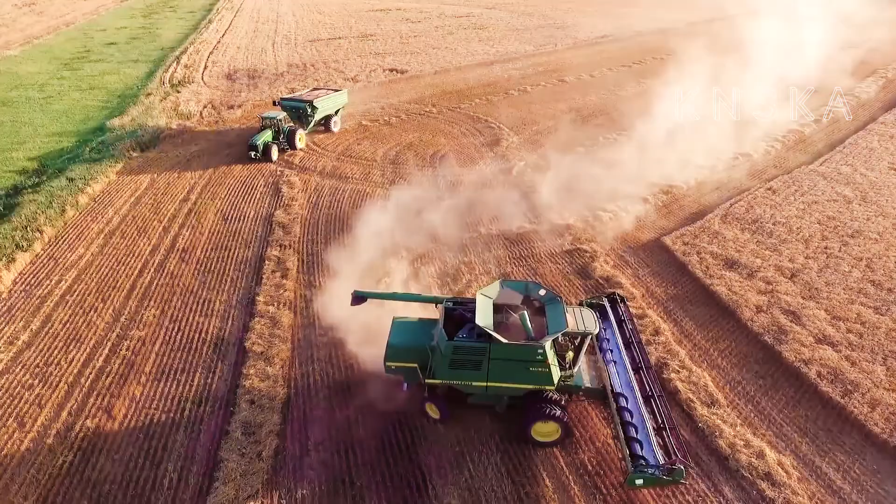Ukraine is the unconditional European leader in production and sales of grain and grain crops. The domestic farmers won this status several decades ago and constantly continue to develop in this direction. The richest Ukrainian black soil, or Chernozem, allows obtaining high crops every year, and implementation of new technologies for cultivation of crops considerably increases the volume of domestic product, which is sold both in the territory of our country and in many countries of Europe and around the world.

Annually, the export of grain grows, and millions of tons of high-quality crops come onto the international markets, where they are successfully sold and consumed by the population of our huge planet.

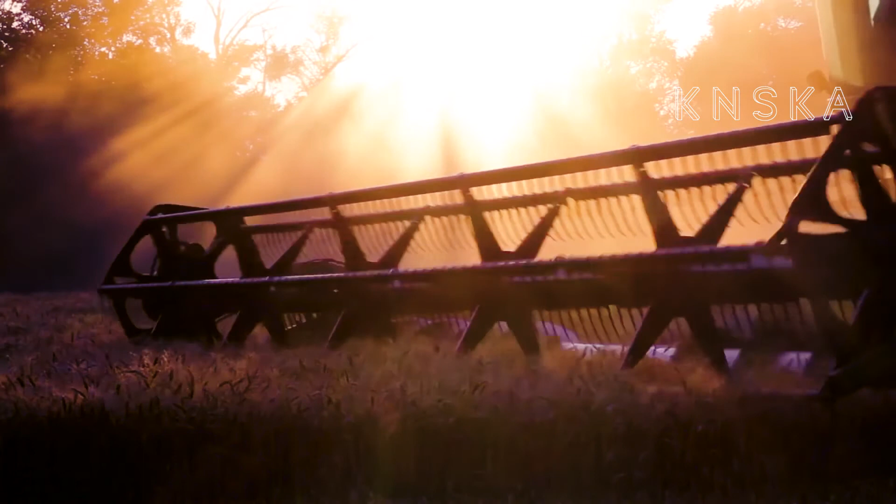But growing up and harvesting the grain crops from the fields is only a part of the huge technological process in this industry. After harvesting the grain, it is necessary to bring it to the necessary grade for further storage, transportation, and delivery directly to consumers.

The first and most important step on this difficult way is to dry the harvested crop, reducing grain humidity, so that it could be stored for a long time without risk of spoiling and ruining the harvested product.

Farmers from around the world understood the importance of this part of the technological process long ago. Therefore, each big farm engaged in production of grain crops uses in their work such a vital mechanism as the grain dryer.

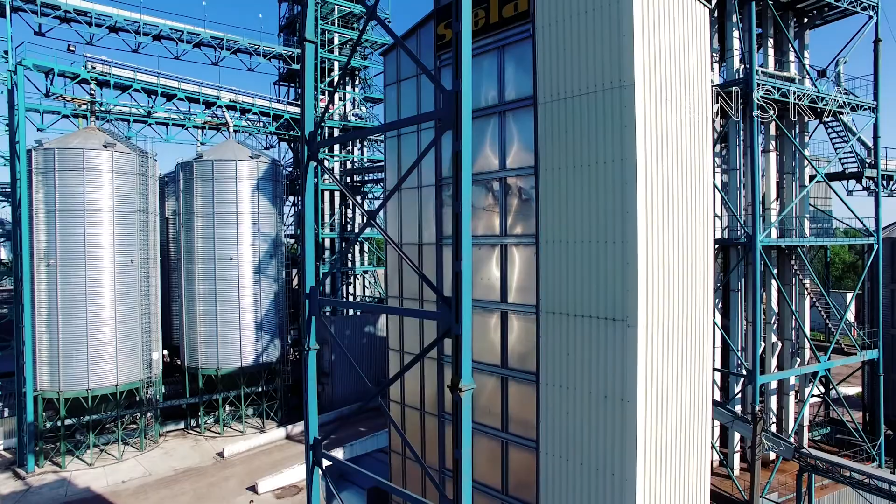German company STELA is a reliable partner in production, delivery, installation, and maintenance of these mechanisms. Today, STELA is the world leader in production of grain dryers that became the reliable partner for many grain farmers working both in the territory of Ukraine and around the world.

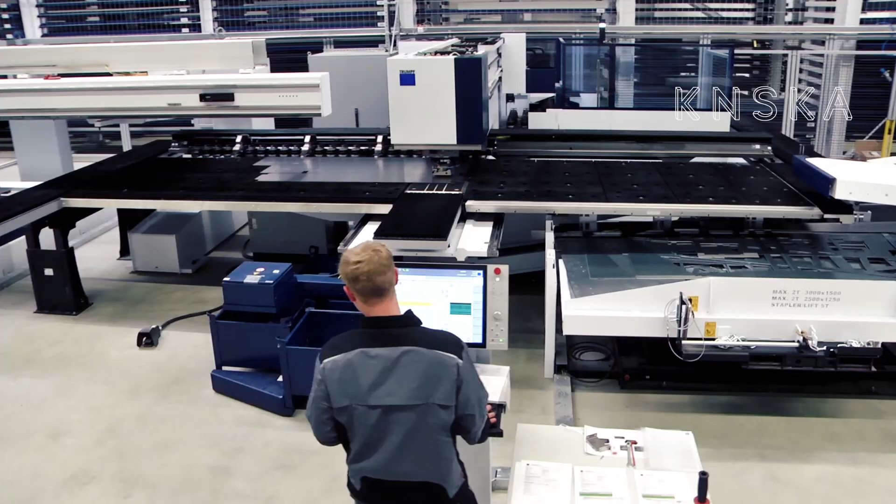For nearly 100 years, we develop, install, and maintain grain dryers, helping to bring wheat, barley, corn, rapeseed, and other grain crops to the necessary grade, as well as to prepare them for long storage, transportation, and consumption.

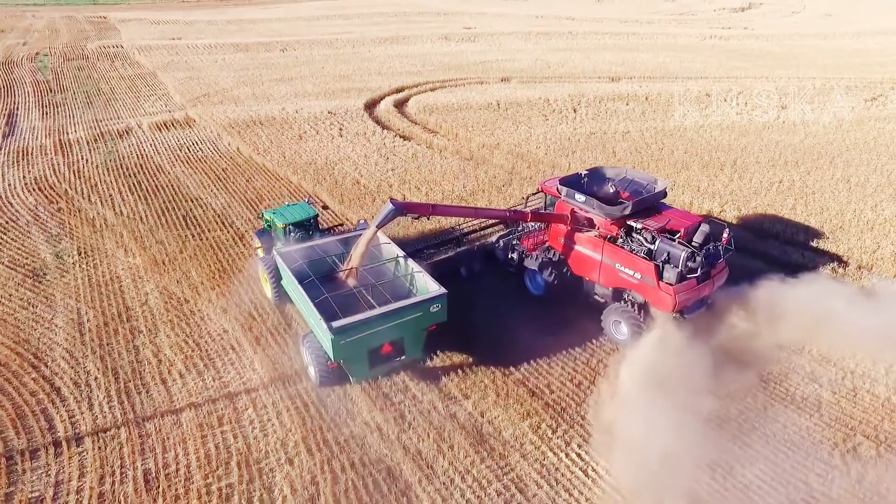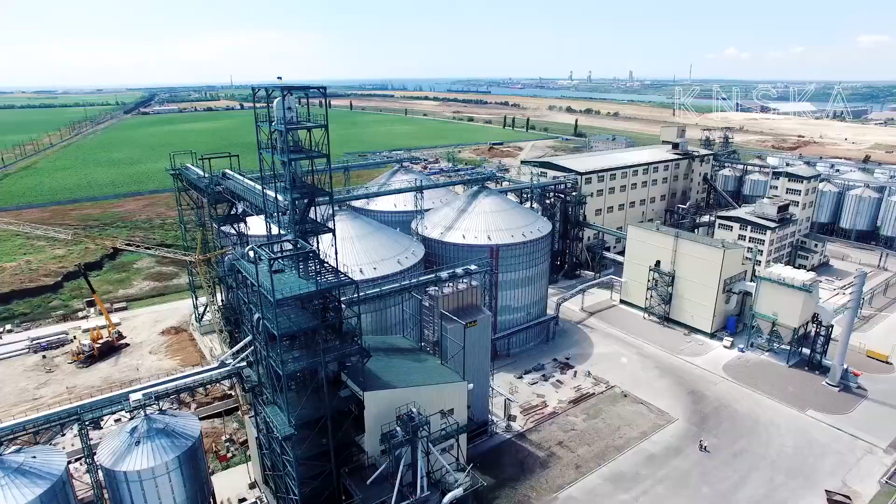Over the years of its activity, STELA Company has developed a large product range of dryers of different types, which are successfully implemented in practice in many countries around the world and are present on all continents of the planet Earth. The number of reliable grain dryers of this company has already exceeded 2,000 units, and new orders continue to arrive regularly. The year of the work beginning of the German giant of drying equipment is 1920.

Its founders, Stefan Laxhuber and Joseph Ackermann, founded the workshop for fitting and tin works in the facility additions of the Laxhuber restaurant in Massing. Primarily, wind turbines for water and electric power supply of individual farms were made here.

In 1926, the paths of STELA Company founders diverged, and each of them began to develop his own business. The enterprise of Stefan Laxhuber is mainly specialized in agricultural equipment.

By the mid-70s, STELA Company became the leading expert in the industry of drying equipment in Europe. By the end of the next decade, the German giant came to produce 120 dryers per year, with orders coming from all continents. By 1997, the experts of the enterprise had installed more than 2,000 drying plants worldwide.

The beginning of the 2000s was marked by greater development of the company, whose experts developed equipment for drying not only grain, but also sawdust, pellets, and other products for non-waste production in the agricultural sector. Step by step, the company switched to production of grain dryers on biofuel and biogas, which increases power and reduces production costs while causing less harm to the environment.

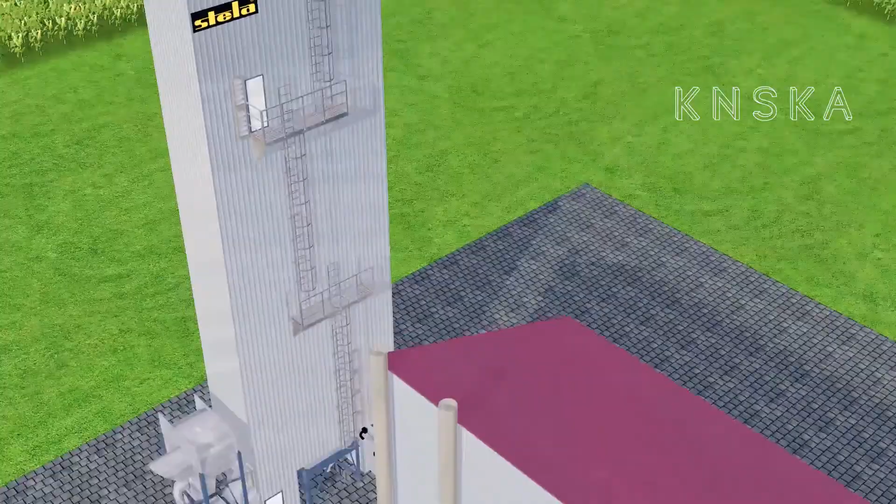Let's consider the main types of grain dryers offered by the experts of STELA Company. Stationary grain dryer MDB XN1/18S. Capacity of the dryer is 22.5 tons of corn or 59.5 tons of wheat per hour.

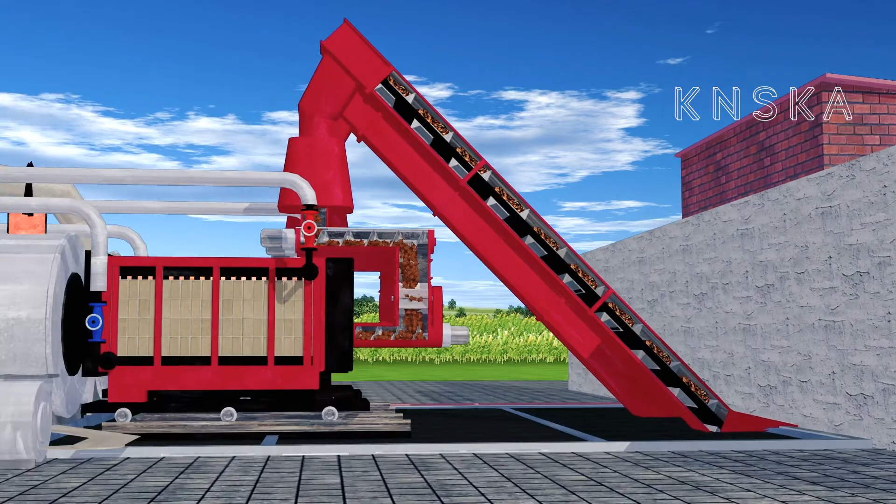The main feature of this dryer is that corn cobs and wood chips, in a proportion of 50-50, are used as the fuel. The dryer is equipped with 2 heat generators.

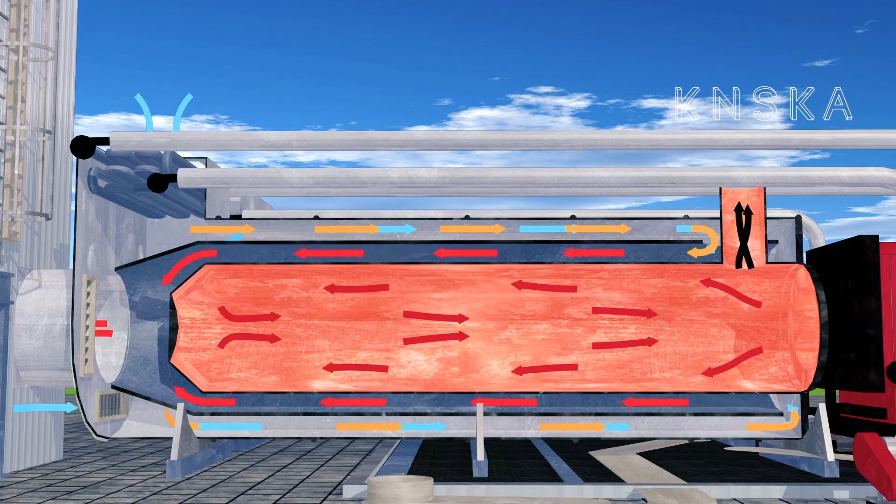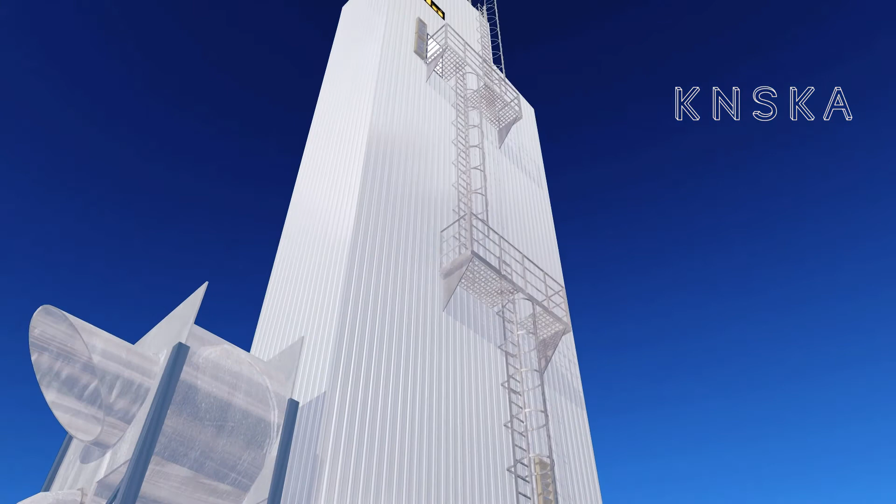The hot air from the heat generators goes to STELA SLI 2800 indirect air heaters. They are equipped with water heat exchangers, the water to which is supplied from the cooling system of the heat generators, so the fresh air that enters the air heaters is preheated. This significantly saves fuel.

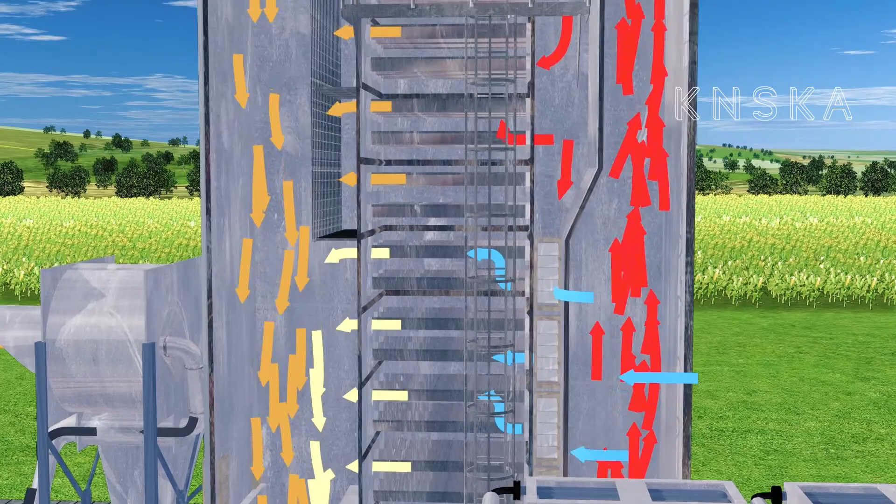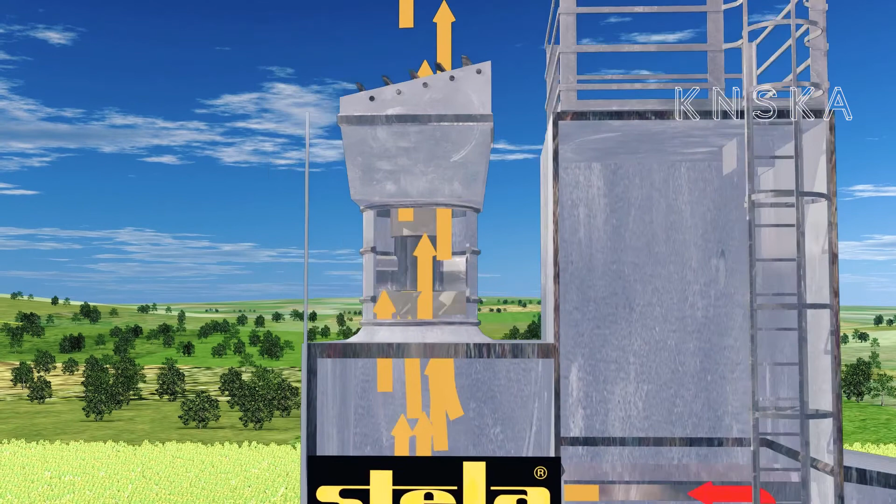The loading of fuel into the heat generators and temperature adjustment is performed automatically. The dryer is also equipped with an exhaust air purification system and full insulation, consisting of mineral wool 120 mm thick, sheathed with corrugated steel sheet. The drying tower of the dryer consists of 18 sections, ensuring uniform air passage throughout the plant height.

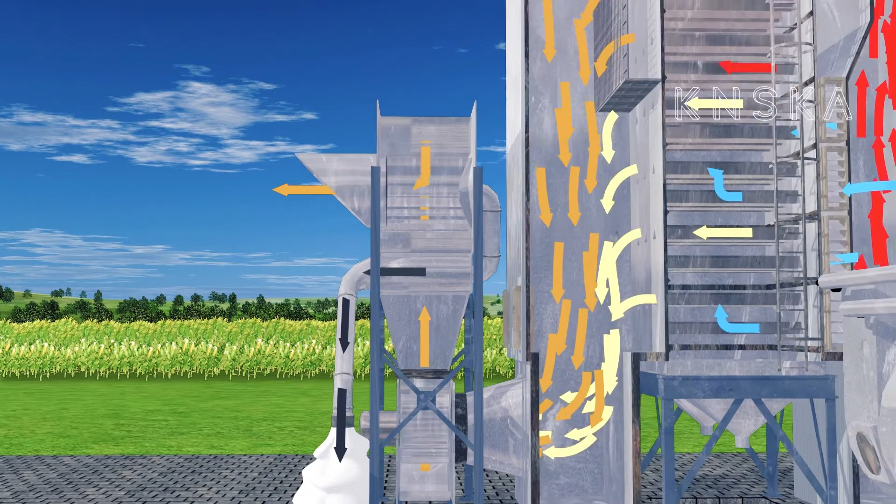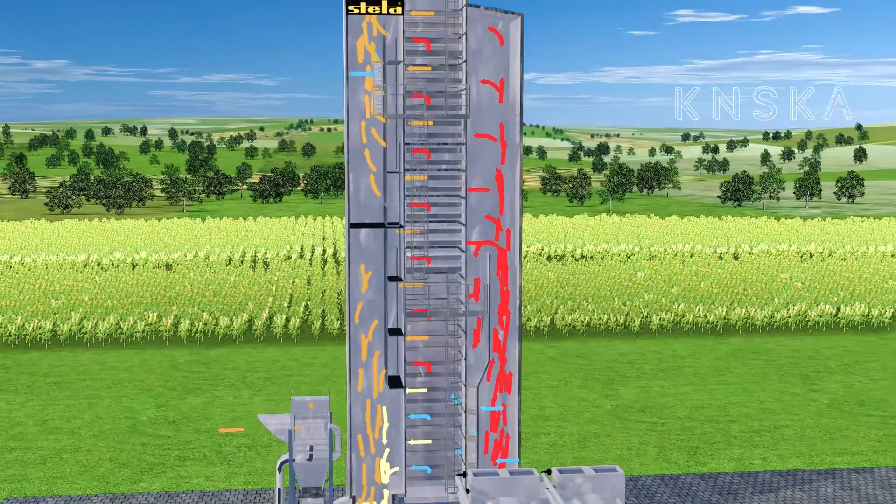The loading of the dryer is performed by the elevator. Both elements of the feed hopper are used for grain accumulation before entering the drying tower. To lift the mechanism up and access inside, the ladder with back protection is installed outside. There is also a ladder for service control and cleaning of air ducts inside.

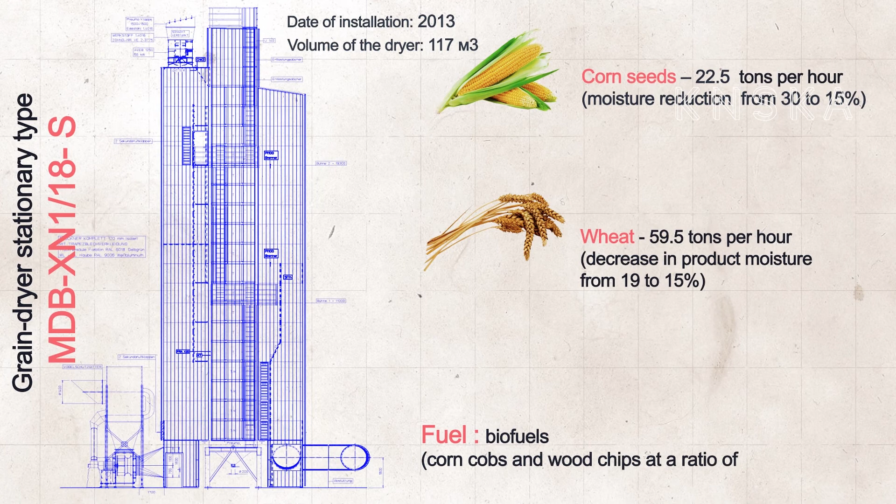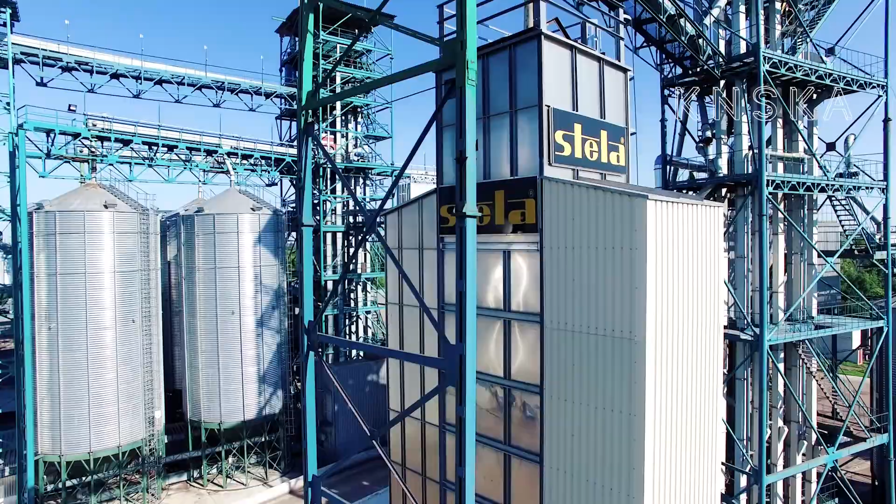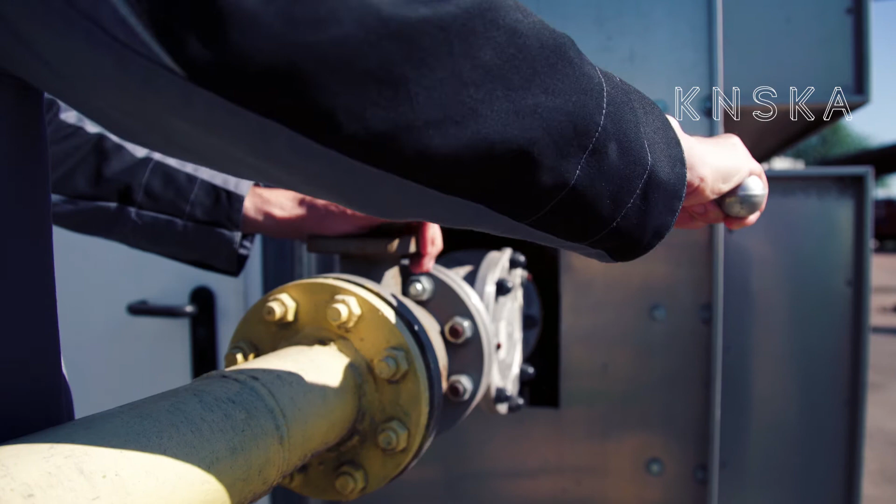The grain dryer GDB-XN1/13SU is the natural gas-fired unit. It allows processing 18 tons of corn per hour, reducing humidity from 28 to 15%. This dryer is equipped with heating section insulation, active recovery system, and centrifugal separator for the exhaust air purification from the dust.

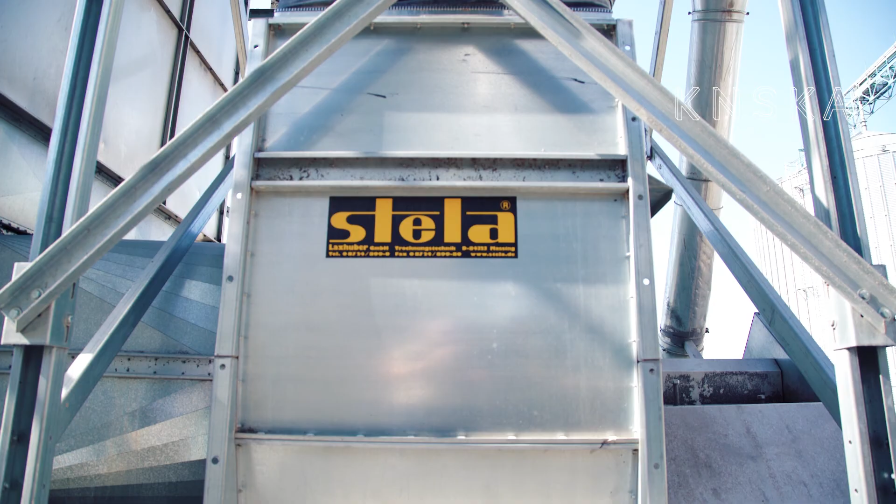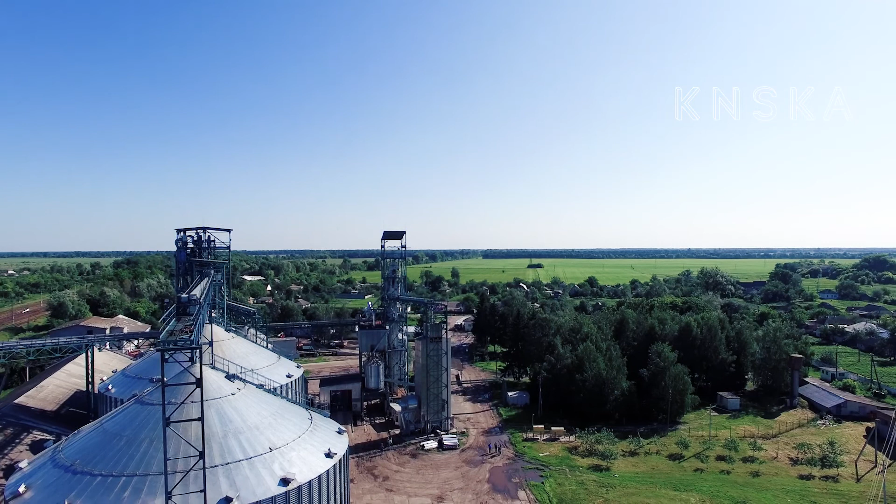The centrifugal separator is the structure without moving parts. It uses the power blow fan of the dryer. The use of the centrifugal separator reduces the level of atmospheric emissions up to 20 mg per cubic meter and even less, allowing installation of the dryers in densely populated cities and villages with strict observance of environmental rules and standards on emissions in any country of the world.

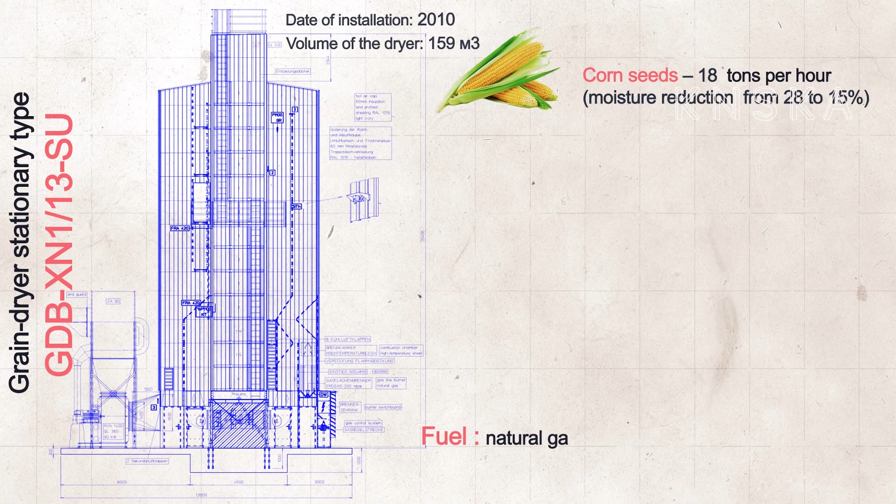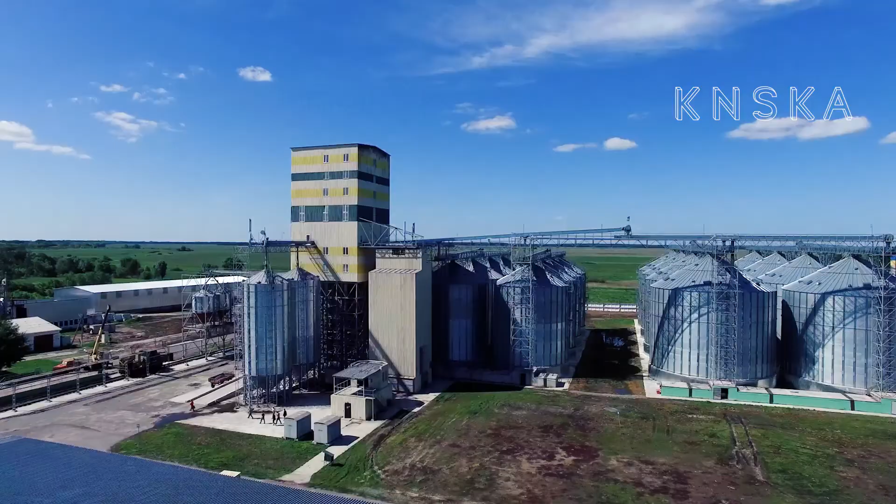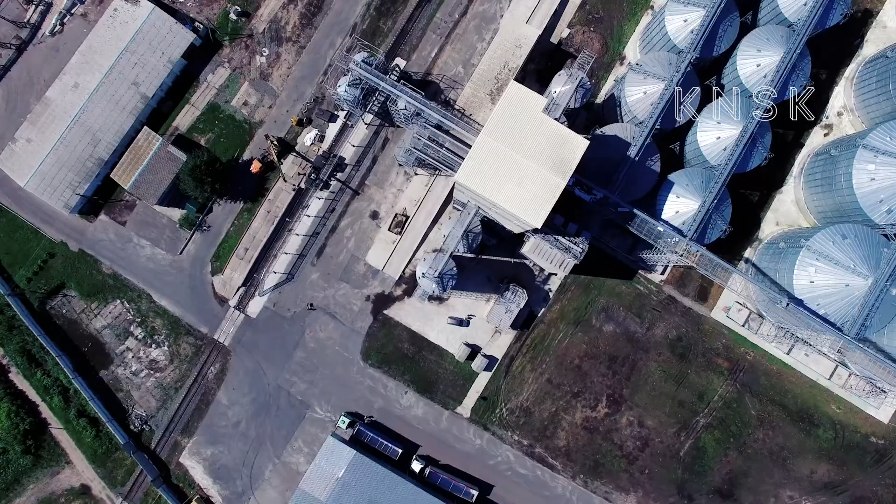The dryer MDB-XN3/15SU is equipped with the exhaust air purification valve system. It provides the process of active heat recovery, including additional fans for warm air intake from the lower sections of the dryer and directing it back to the heating zone. It ensures gas savings of about 20% in comparison with the dryer without heat recovery.

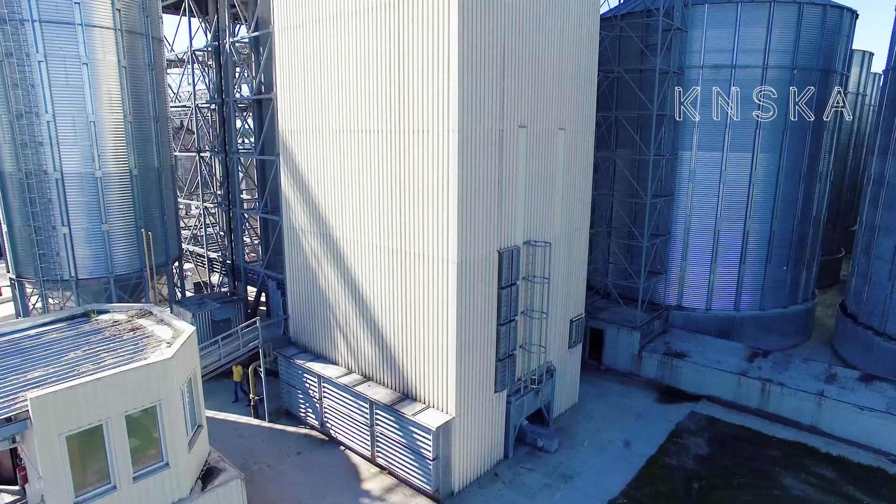In addition, the plant is equipped with a humidity automatic control system, FRA 420. As well as all dryers of STELA Company, the structure is made of seawater-resistant, high-quality alloy aluminum that significantly extends its service life.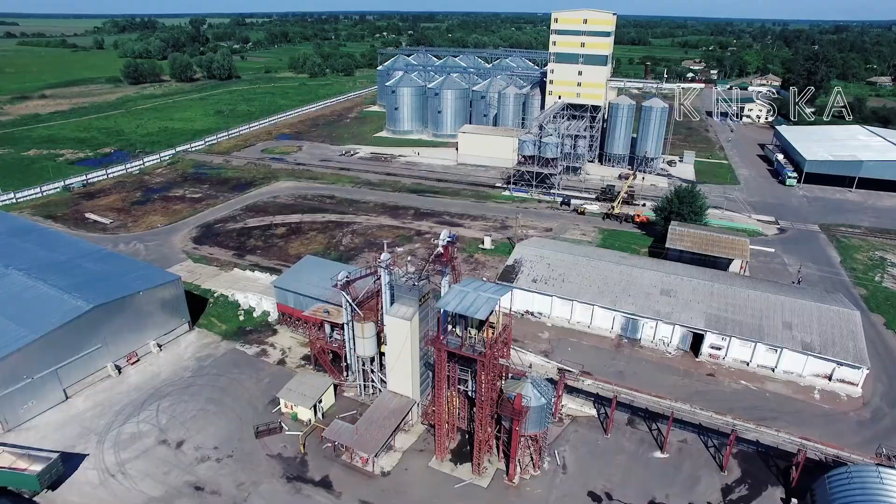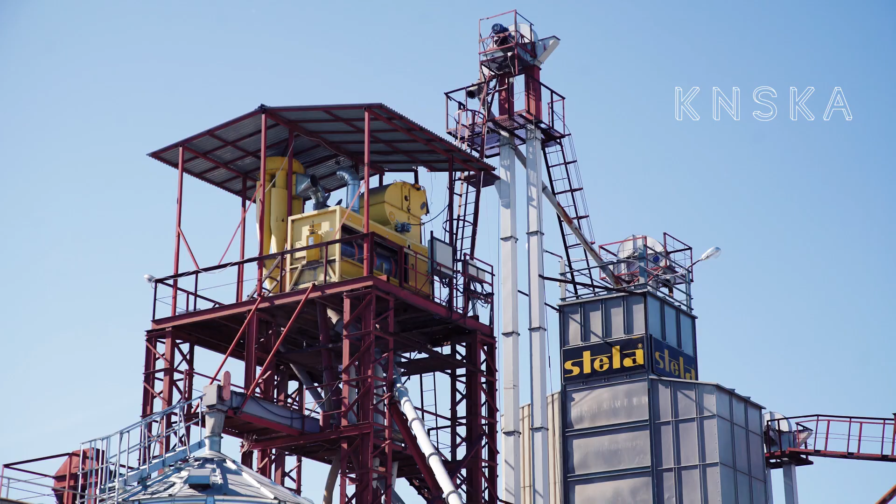The dryer GDB-XN1/10R was installed in 2006 in Agrodome Company. Its feature is that the air heating in this dryer is performed by the indirect air heater and gas burner of Weishaupt Company. The indirect heating is best to use when drying oil-bearing crops. It allows eliminating the fire risk almost completely.

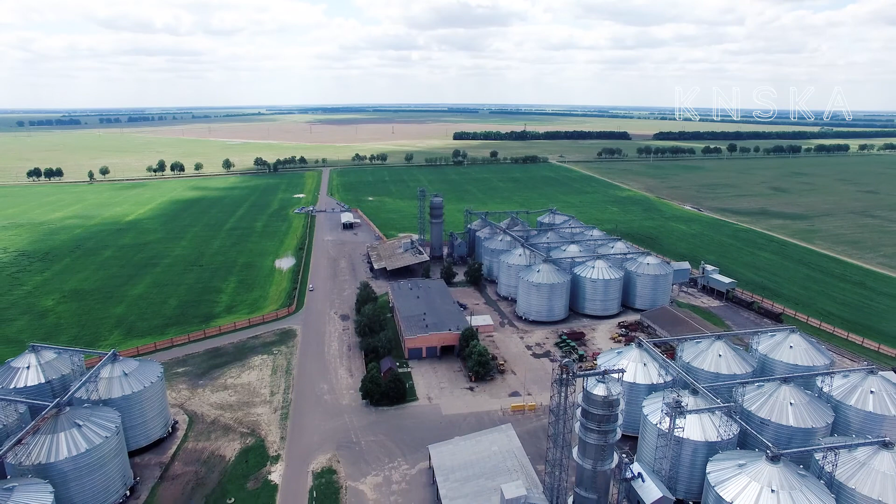The grain dryer MDB-TN2/13, installed in 1997 in Bobrovica city of Chernihiv region at Volya Company, has been used for almost 20 years. During this time, the dryer has provided its reliability and quality because STELA Company uses only high-quality materials and components.

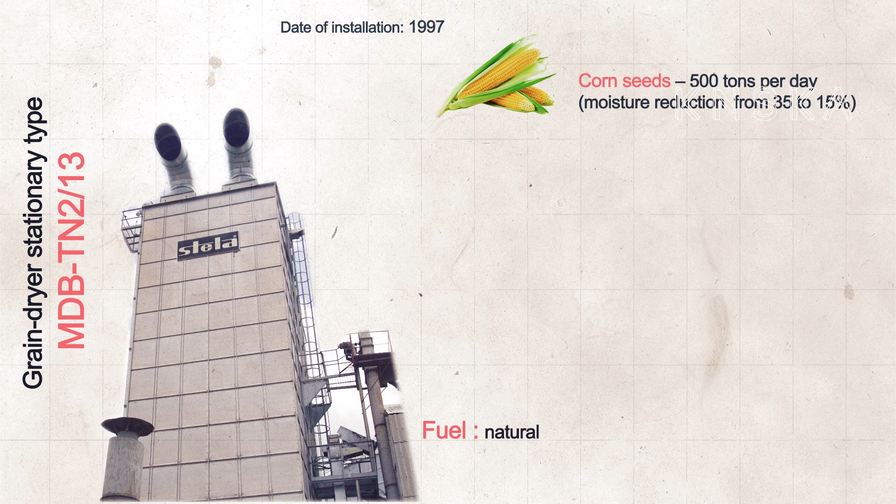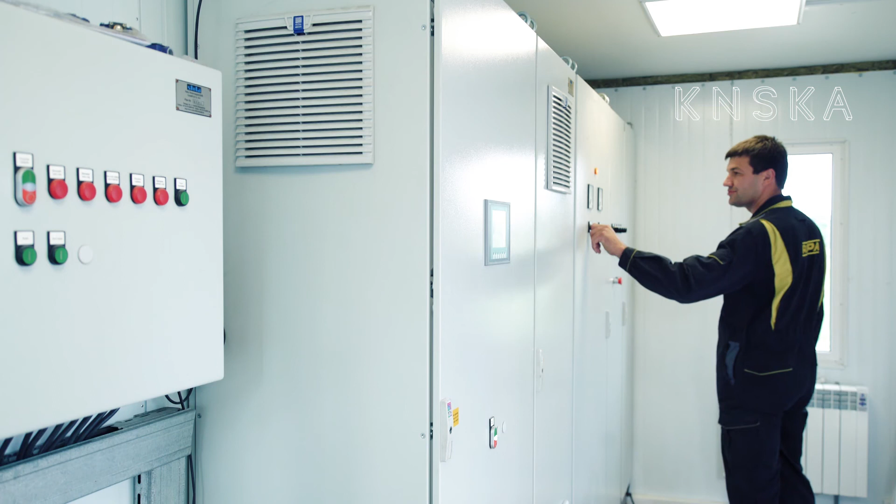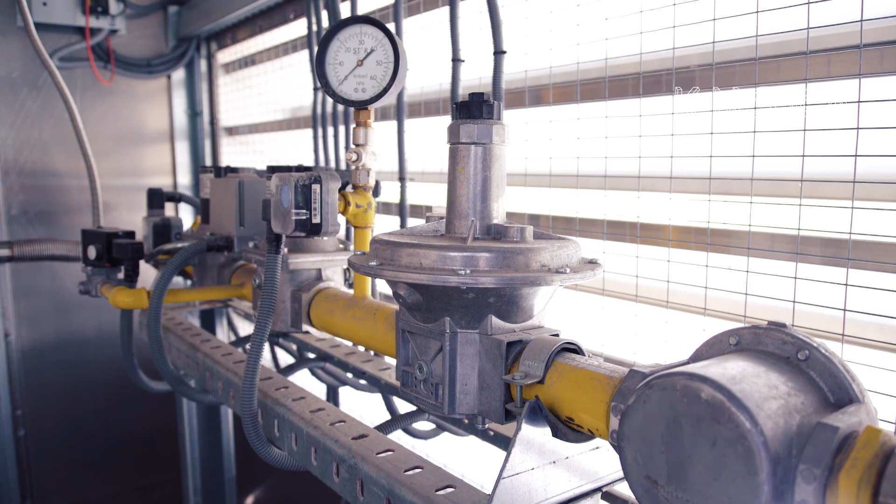Ropa Ukraine Company, in a very short time, built a small elevator for their own needs. When choosing the dryer for the enterprise, they trusted the experience of STELA Company, which delivered the small dryer MDB-XN1/7S for this company. When choosing the fuel, they decided on liquefied gas. It helped to adjust and commission the dryer quickly.

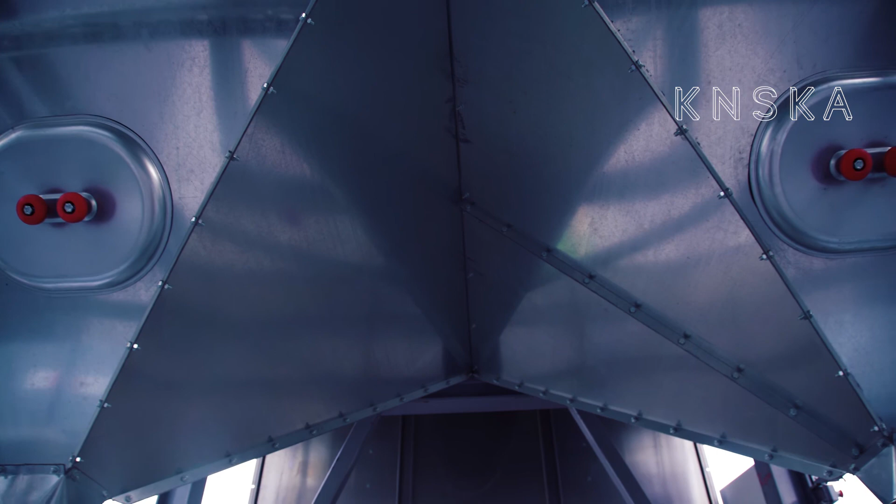The plant is equipped with a system of exhaust air purification from the dust, with the exhaust fan controlled by a frequency converter, regulating the fan rotation speed and thereby directing the airflow. It helps to quickly adjust the dryer for drying different crops. The use of frequency converters also allows reducing the load on engines and electric power consumption by approximately 20%.

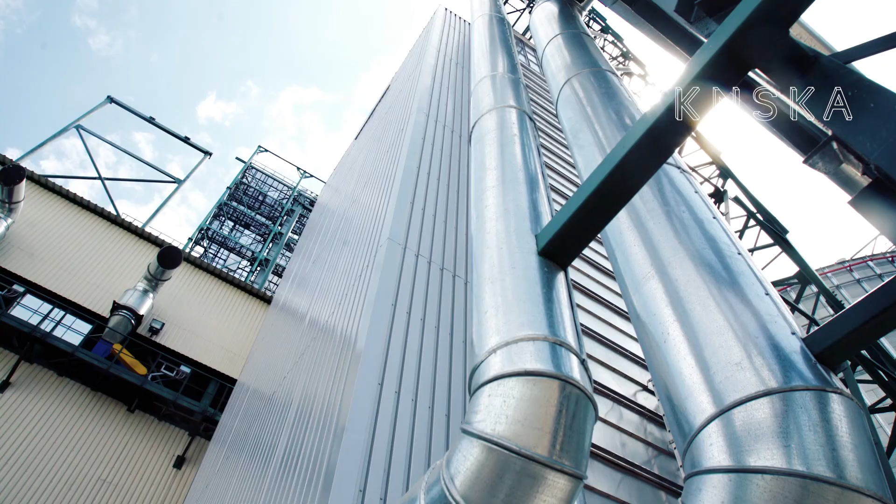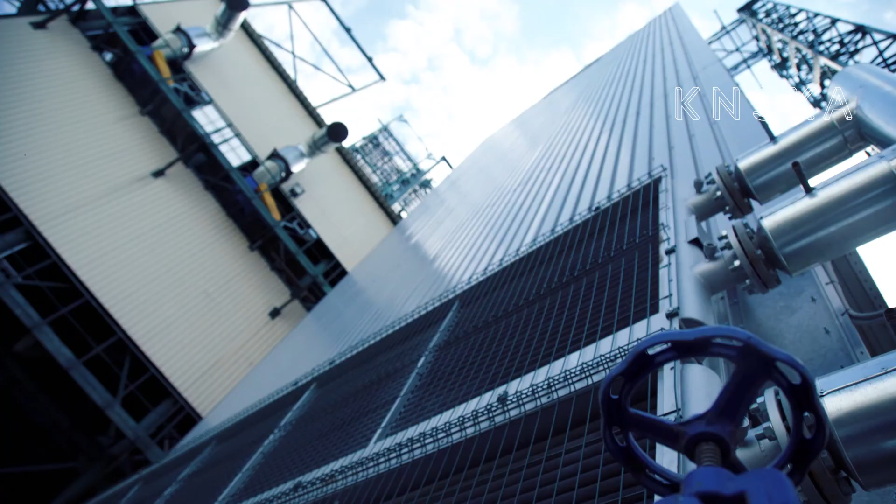The feature of the unit MDB-XN3/17S is that it is designed for drying oil-bearing crops. Therefore, much attention was paid to safety. The dryer is equipped with exhaust air temperature control system BME-20 Air, with 20 sensors in each of the 3 towers, firefighting system, as well as grain temperature sensors.

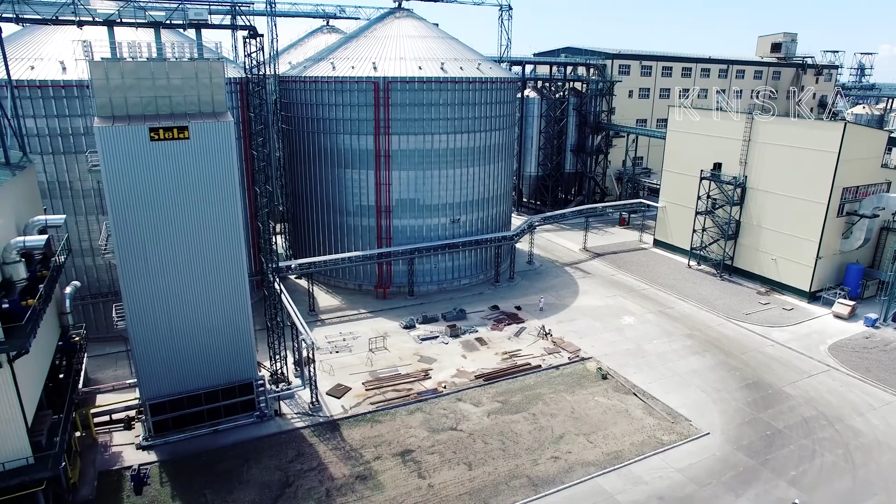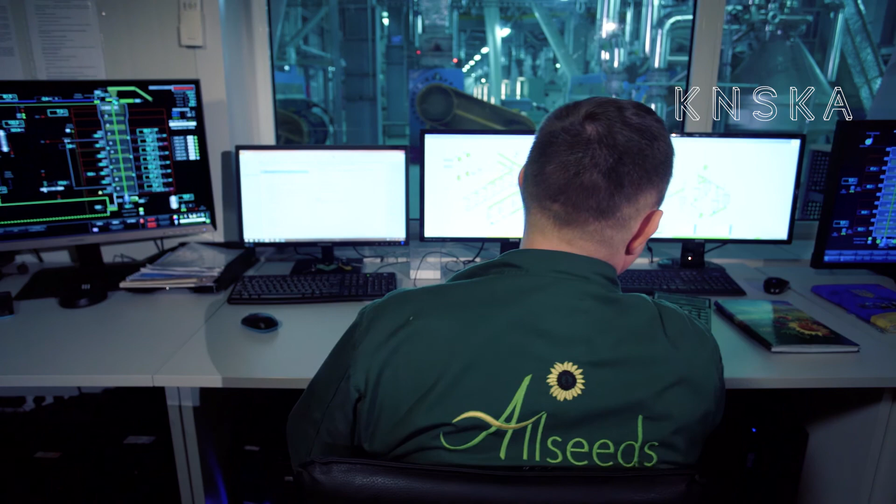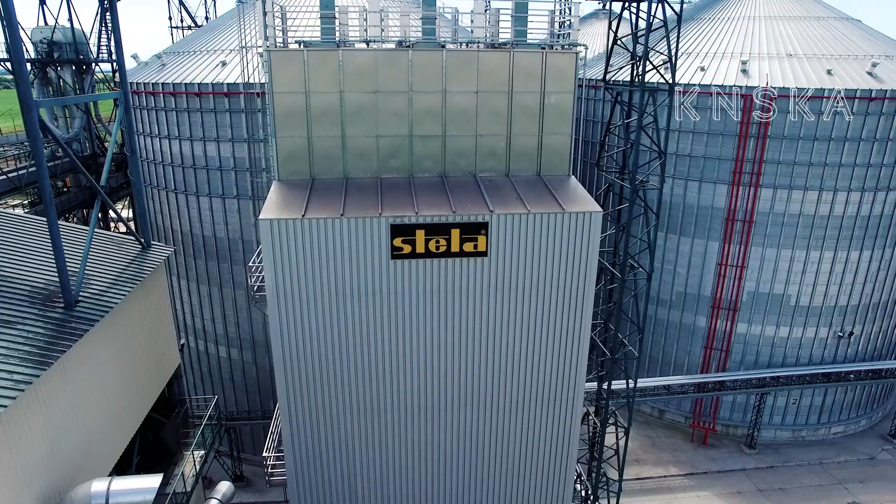The dryer is also equipped with a valve system of exhaust air purification from the dust, humidity automatic control mechanism FRA 450-2, as well as air heating section insulation and frequency converters. There is a surplus of steam produced by burning sunflower husk at the enterprise, so it was decided to equip the dryer with a 4 megawatt steam heat exchanger. The maximum steam consumption is 7 tons per hour, temperature 180 centigrade, at a pressure of 10 bars. As the standby heat source, the dryer is equipped with a horizontal gas burner.

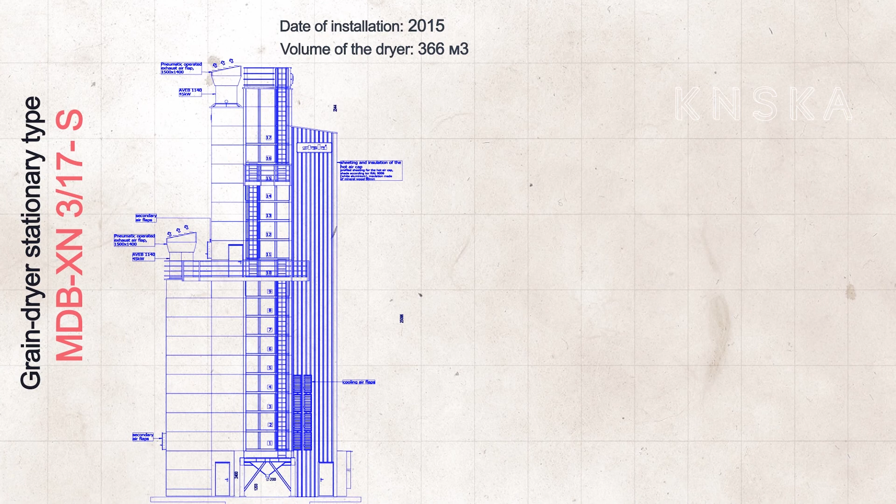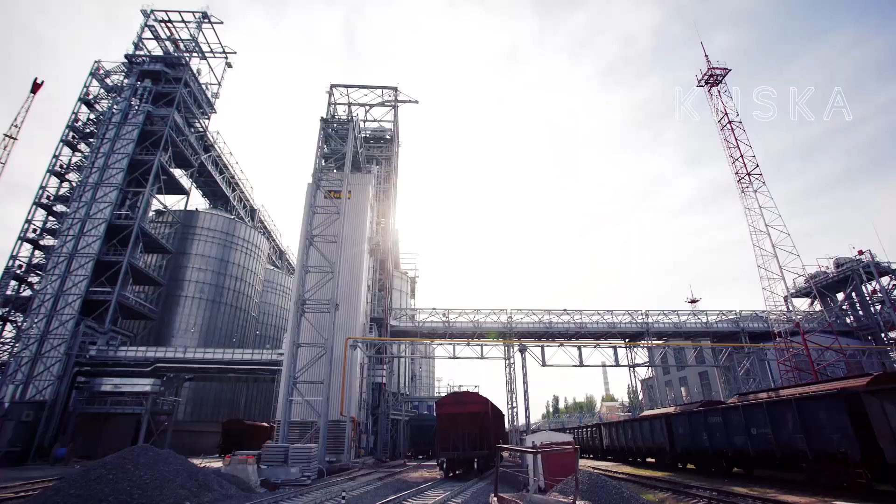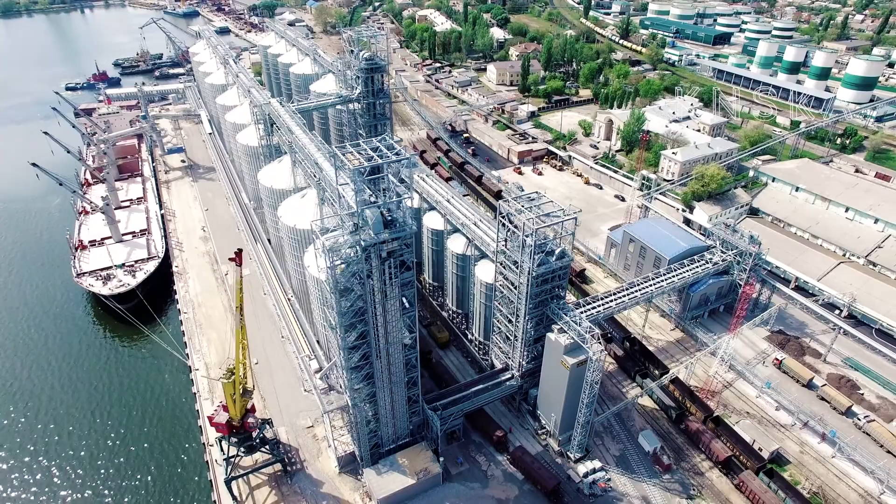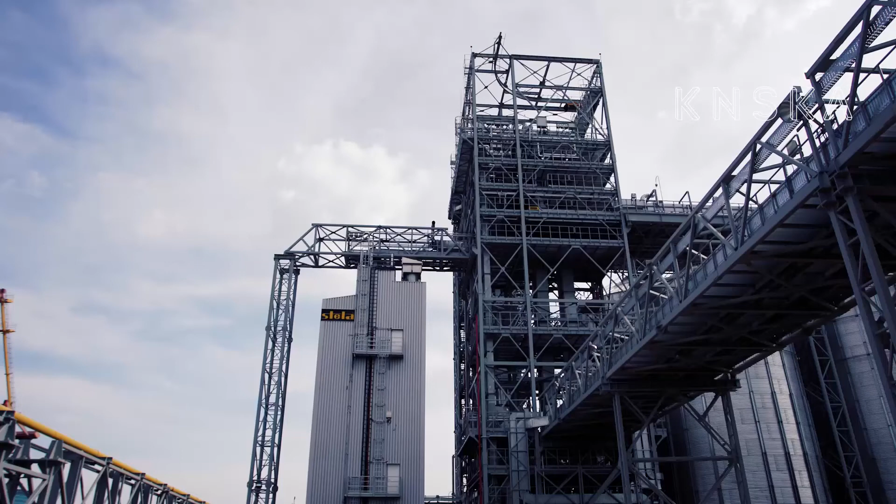The grain dryer MDB-XN2/18SU is equipped with the active heat recovery system, full insulation with mineral wool 120 mm thick, humidity automatic control systems FRA 450-2 and FRA 420, frequency converters, systems of exhaust air purification from the dust, Combi air clean system, and remote access system that allows monitoring the working process of the dryer at a distance. The modification edition includes the exhaust air temperature control system BME-20 Air, 20 sensors in each of the 3 towers, as well as a modern firefighting system.

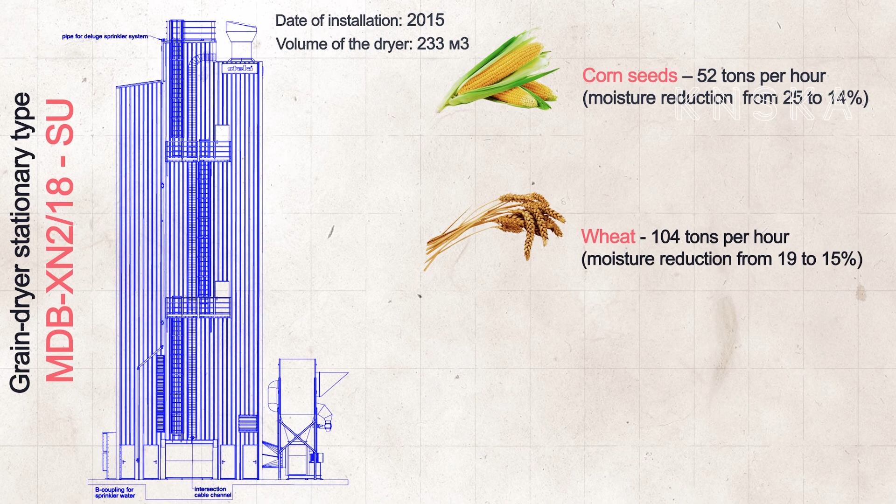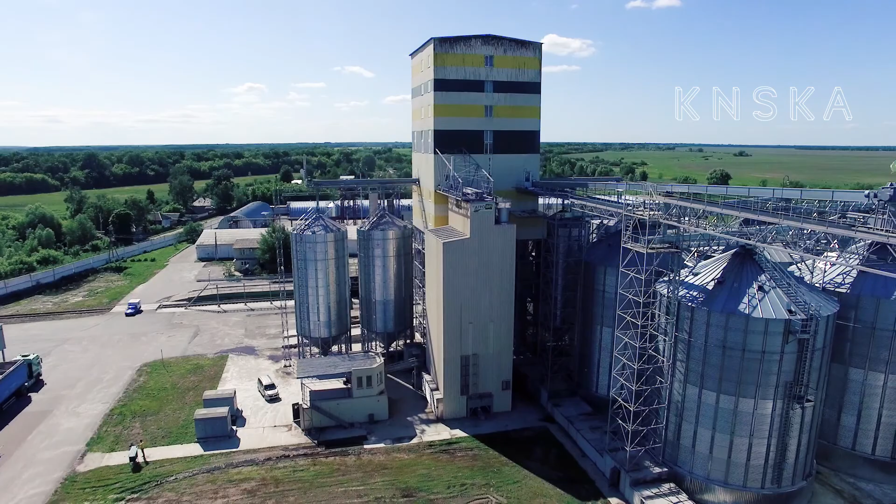Not all grain dryers of STELA Company are big and designed to serve powerful agro-industrial complexes. The range of mobile dryers of 3 models, MUF45, MUF70, and MUF110, produce 45, 70, and 110 tons of corn per day, with humidity decrease from 35 to 15%, was developed and put on the market for small and medium farms.

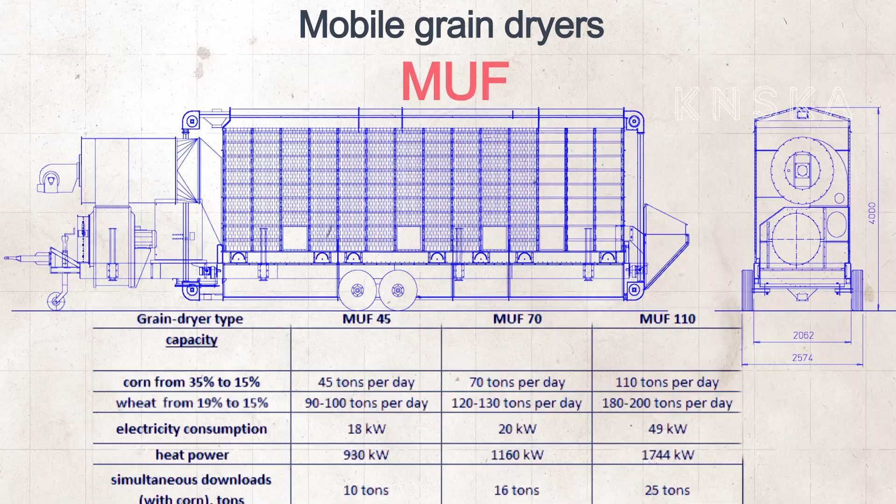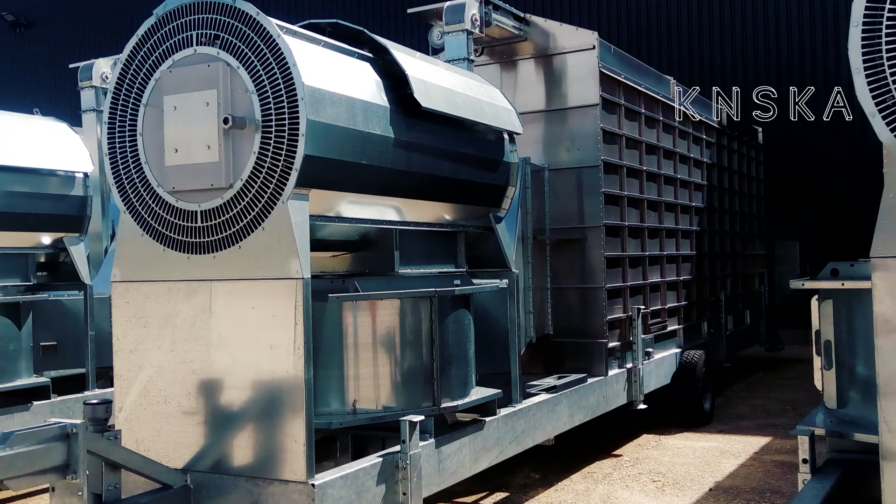Due to gradual temperature regulation, it is possible to dry all types of grain and oil-bearing crops on the mobile grain dryer of MUF model. The fuel for this model of dryers is diesel, natural, or liquefied gas. It is also possible to equip the dryer with a combined burner that can work on 2 types of fuel, for example diesel fuel and natural gas.

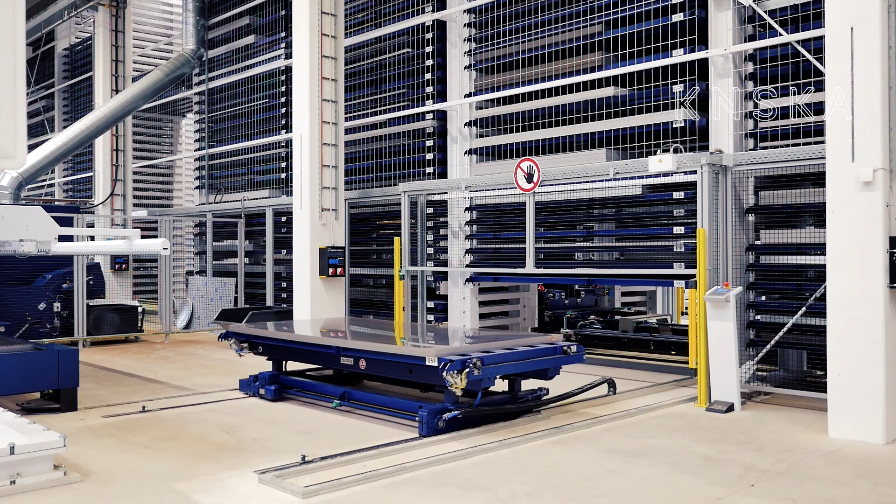The case walls are made of semi-rigid sheets of high-quality aluminum alloy with longitudinal grooves. This material is anti-corrosion, perfectly protected from the effects of weather conditions and warm humid exhaust air. The mobile design of the MUF dryer allows moving the plant quickly. This model is a perfect circulation dryer with sufficiently high capacity, designed for farmers and small agricultural enterprises.

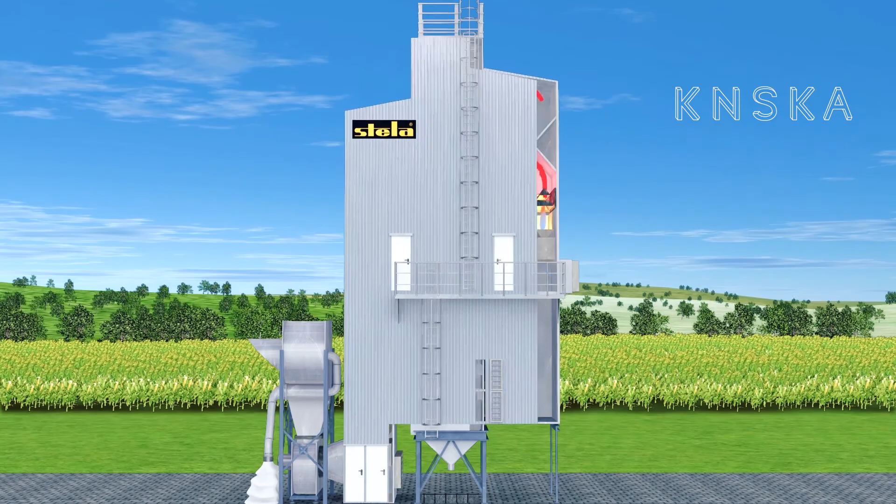The technologies do not stand still, and experts of the German giant constantly develop and put new ideas on the market. At the moment, the flagship development of STELA company is bi-turbo technology. This is a new word in drying of grain.

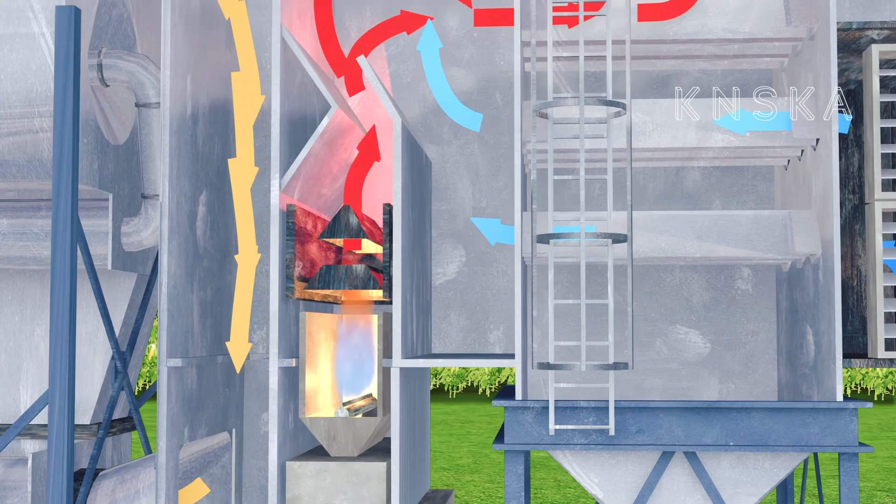The innovative technology of the air duct system helps to reduce the required volume of hot air by 40%, and thereby reduces the specific consumption of thermal energy by 15% in comparison with the regular dryer with active heat recovery, while allowing you to save up to 20% of the electric power.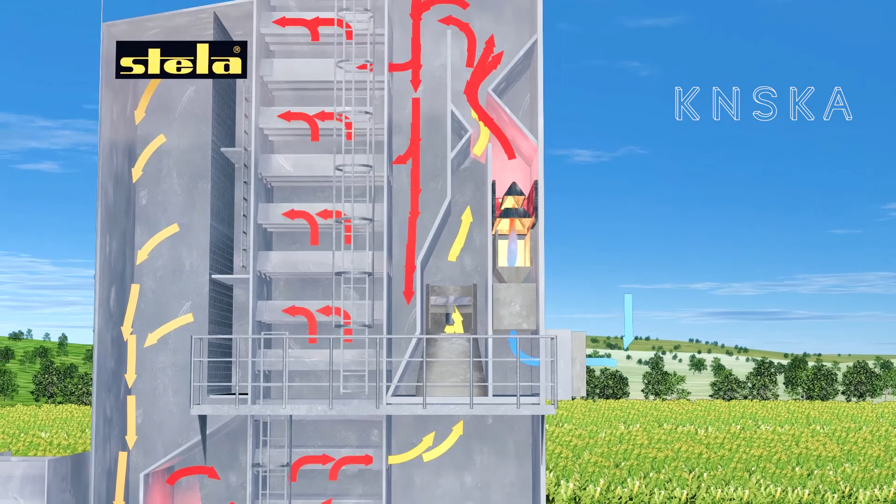Its need for thermal energy amounts to approximately 0.922 kilowatt-hours per liter of water.

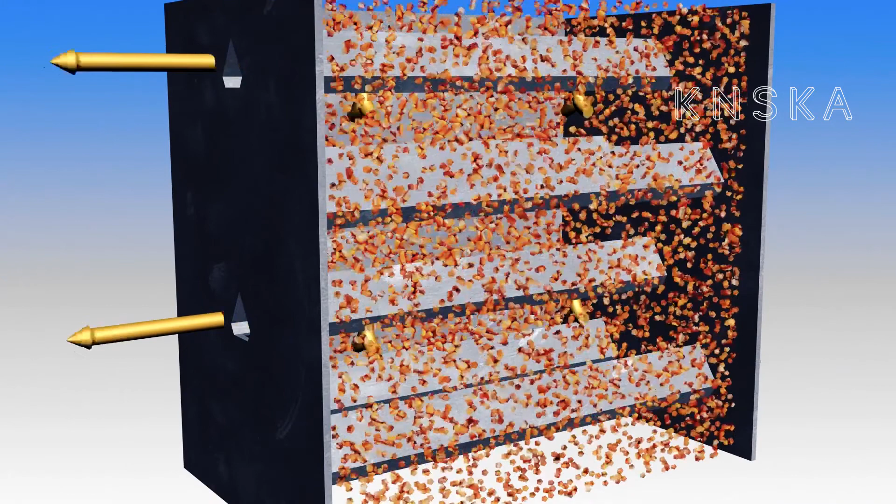The additional advantages of this system are the best grain quality due to use of variable ventilation and different temperatures, decrease in dust generation due to filtration of the exhaust air in the area of wet product, as well as reduction of carbon dioxide emissions. In addition, there is the variation of bi-turbo working on liquid fuel.

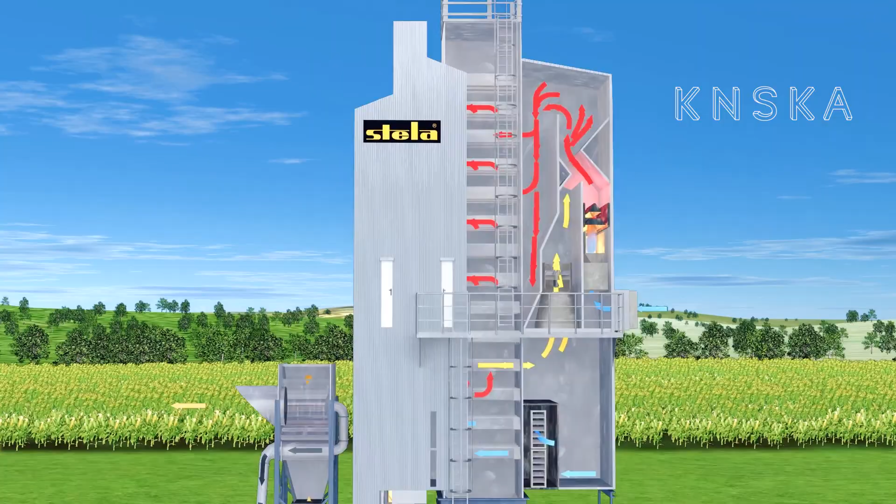But it is not enough only to deliver the equipment to the farm. After its installation and commissioning, high-quality maintenance is necessary. The representative office of STELA company successfully operates in the territory of Ukraine for many years. The central office of the German giant in our country is in the capital of Ukraine, Kiev. The experts working here are ready to help their customers 24/7.

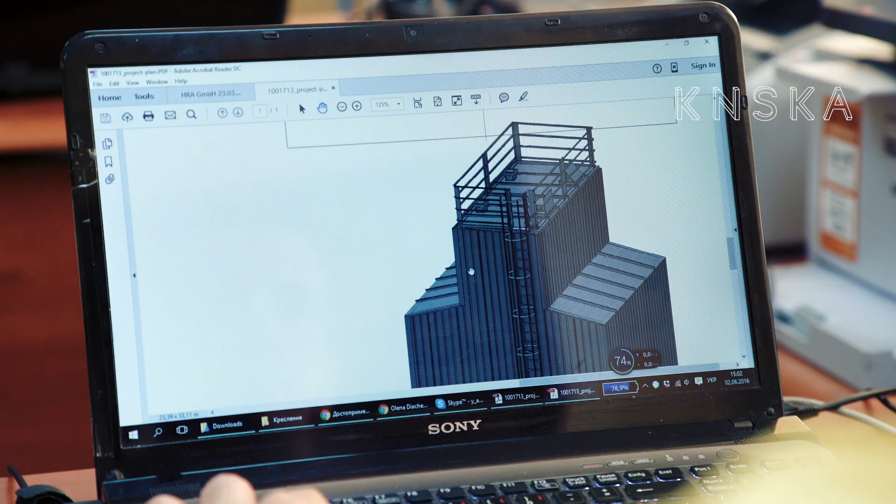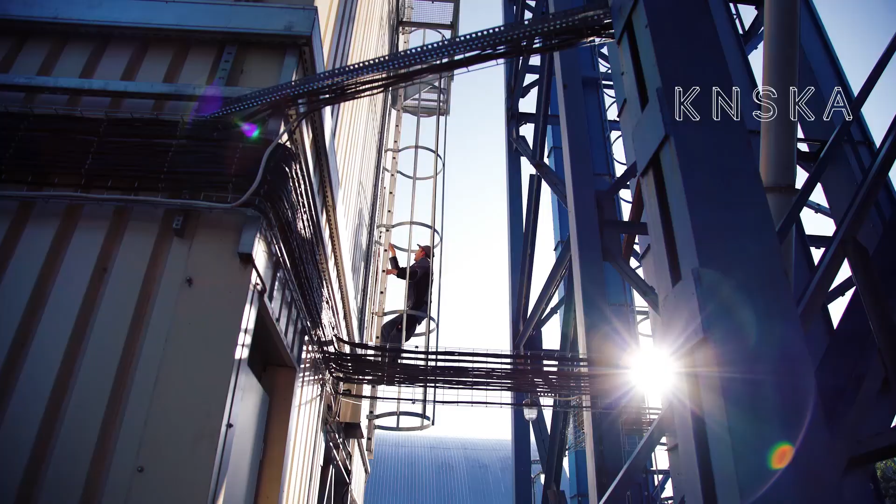They provide both information services on selection of the equipment and reliable service maintenance of the operating equipment. Each farmer knows that idle time of the drying plant is not allowed, as it can result in enormous losses and even loss of just harvested crop.

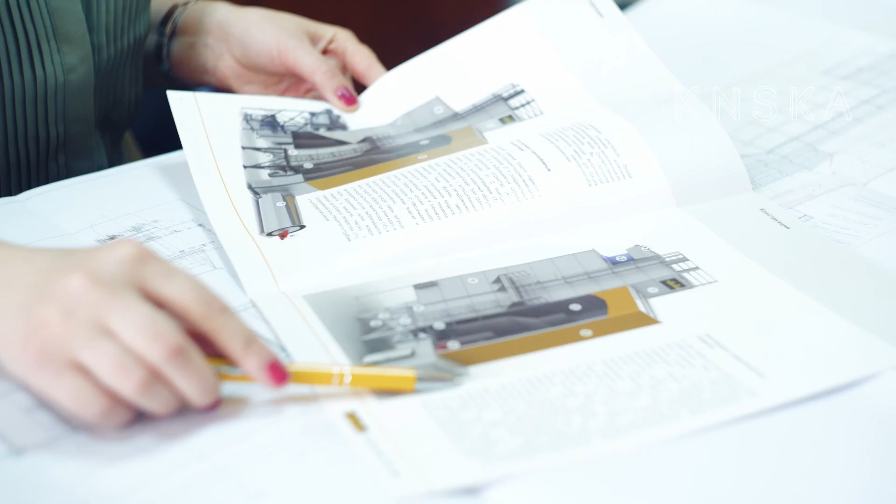Therefore, the service center of STELA company accepts orders for emergency repair 24 hours per day. Those already working with the equipment of this company could fully realize its reliability and response rate of the experts of the enterprise, who come to the site and eliminate all failures in the shortest time.

For many years, STELA company operates according to the philosophy to achieve the highest possible production level in the industry. This idea is implemented under the slogan, "Service for clients." Thus, there is the possibility to quickly respond to customer needs, as the company produces the special parts used in production by itself.

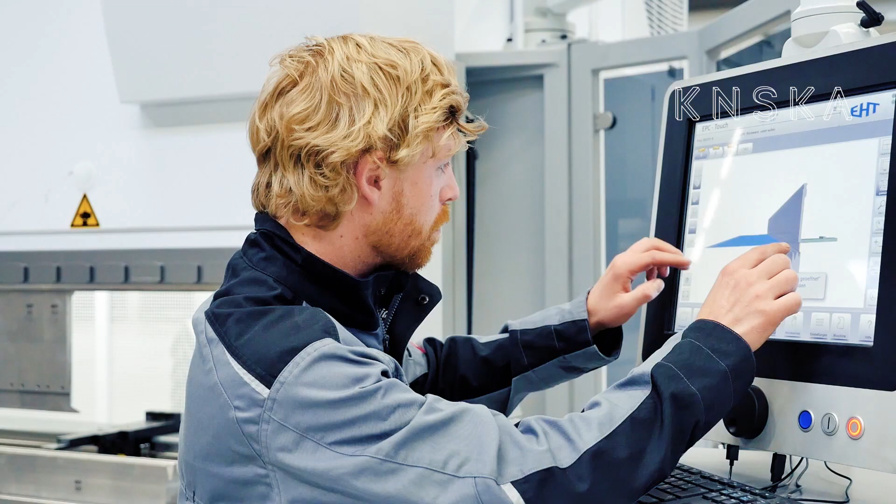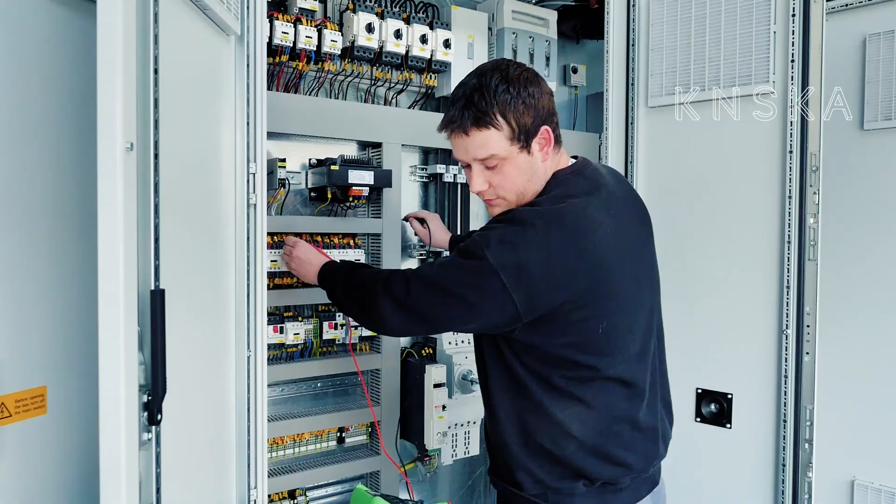Such specialization in the main sphere of activities allows the company to continue to grow for many years, both at national and international levels. The dryers of STELA company work not only in Europe, but also in South America, Central Asia, Canada, and even in New Zealand.

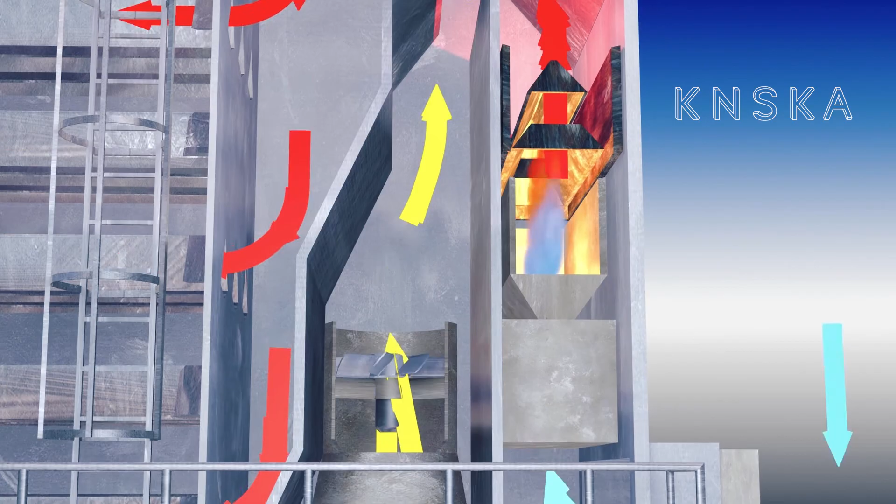Today, the German company STELA is one of the world leaders in the market of drying equipment, and bi-turbo technology developed by its experts allows speaking about innovative leadership for future years. The technologies do not stand still, and the experts of the company constantly develop new systems that can improve the efficiency and performance of the plants for the most demanding clients.